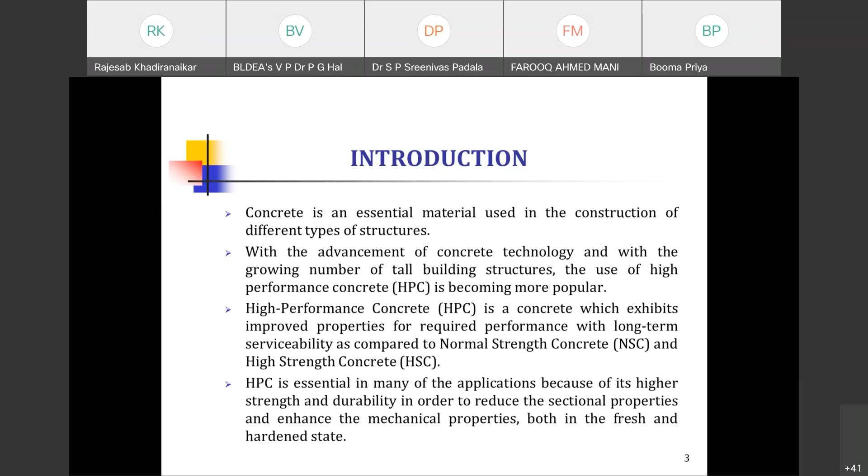But for in situ construction, going in for these kinds of techniques may not work. However, they were able to produce high strength by applying high pressure. That was the earlier attempt, and later in 1984, the American Concrete Institute adopted high strength concrete as a concrete with a strength more than 40 or 41 MPa.

And here, in my discussion, of course, there are no standard yardsticks for defining high strength and high performance as such. The strength limits that we are considering are time dependent as well as geographical location dependent. The concrete that was high in strength, for example, in the 1960s may not be treated as high strength now. So in 84, America for the first time defined concrete with a strength more than 41 MPa as high strength, and they adopted these concretes in actual construction also.

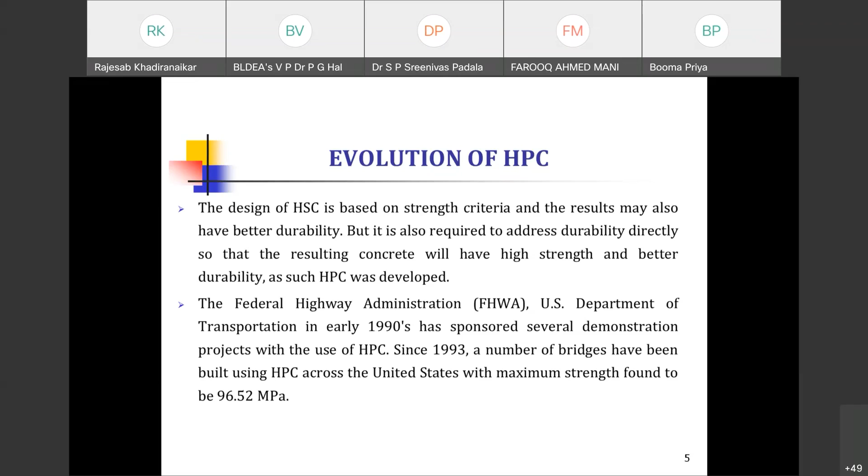So before we proceed ahead, let us see how high performance concrete is defined, and then regarding mix design, and after that we'll go on to the properties. Let me make it very clear that there is no universally acceptable definition of high performance concrete so far. And of course, as I said, it changes from place to place, and the time domain is also important. But there are some definitions which are broad, embracing these. I have given some of them here. There is no common definition for high performance concrete as such.

As I said, for high performance concrete there is no universally acceptable single criterion, and it depends on the required performance characteristics. If you have offshore structures, then the performance characteristics are different. And if you have freeze-thaw resistance, then the requirement is different. So it depends on what the intended use is and what the required performance level is. Based on that, many researchers and some bodies like ACI have defined high performance concrete from different considerations.

Then according to Mehta and Aitcin, who are pioneers in the development of high performance concrete and have contributed extensively to mix proportioning as well as experimental testing, the concrete which possesses high workability, high strength, and high durability is termed as HPC. This is the most general. So here it is clear that it covers almost all the desired properties of concrete in the fresh state as well as in the hardened state. Better workability is in the fresh state, and strength and durability in the hardened state. This was broader.

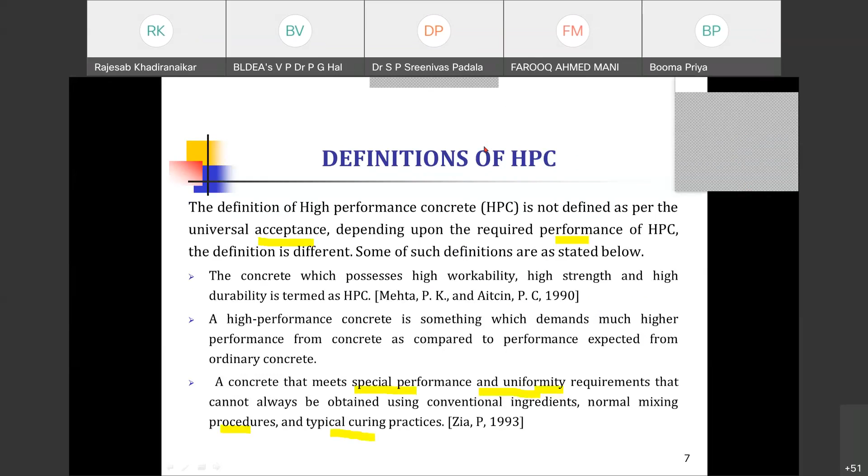Well, another important definition was proposed by SHRP, that is the Strategic Highway Research Program. SHRP defines high performance concrete, mainly keeping in view the requirements of highway construction. So HPC for highway application is defined on strength, durability, and water binder ratio criteria as summarized below. The compressive strength is determined for 100 mm diameter and 200 mm height cylinders.

Earlier, we were strictly adhering to the bigger size, that is 15 centimeter diameter and 30 centimeter height cylinder. But it has been found later that even if you go for smaller sizes while maintaining H/D ratio 2, you get reliable results. So that's why they used 100 mm diameter and 200 mm height cylindrical specimens. And water cement ratio is determined for all cementitious materials. And durability factor is in terms of 300 cycles of freezing and thawing.

So there was a thrust on strength as well as the water binder ratio, because you know that the performance characteristics, particularly the porosity, that is the diffusion or permeation characteristics, depend on your water binder ratio. So they consider the strength requirement, the water binder ratio and durability characteristics, that is 300 cycles of freezing and thawing. In 6 hours, SHRP expects around 14 MPa, then 17.5 MPa in 4 hours, around 35 N/mm² in 24 hours, and then around 70 MPa in 28 days.

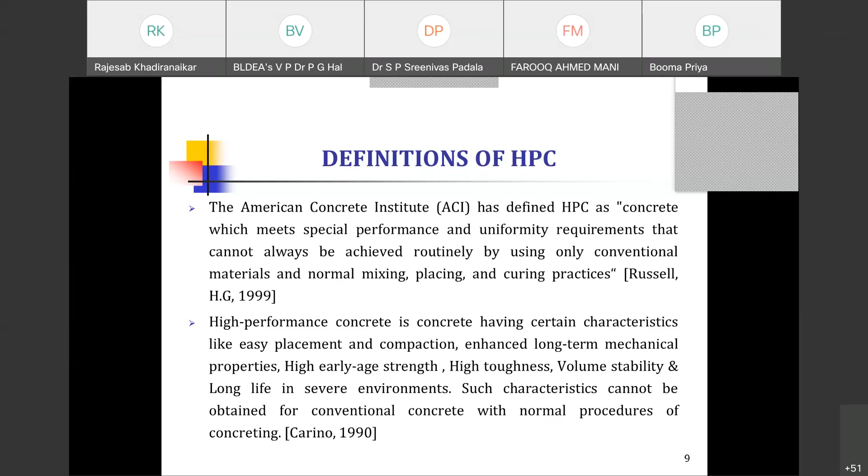Well, so now let us see, this is what the basics are, that is, some of the definitions. Of course, there are so many other definitions also. That is Civil Engineering Research Foundation, CERF. R.N. Swamy has also defined, Paul Zia. There are so many other researchers who have defined high performance concrete, but since we are more interested in properties and these things, ACI is the most widely accepted. So let us not go into much detail on only the definition part of it.

Well, so then how is your high performance concrete different from your conventional concrete? As you have already seen, it has improved performance at the fresh state as well as the hardened state. Then definitely it would have improved mechanical properties, durability, and behavior of HPC. It differs significantly, to a very large extent, as compared to normal strength concrete and high strength concretes, due to a dense microstructure by use of finer materials as well as superplasticizers.

So if anybody has studied the mechanical properties, why we have a particular type of behavior for conventional concrete, that is curvilinear stress-strain characteristics, and then micro cracking, all those. You might have already studied or be aware that those properties are basically because of the kind of cracking that takes place even before a conventional concrete is loaded. That is, the microstructure is responsible for the type of behavior that you have for your conventional concrete. So since you are changing the microstructure here, accordingly there is a change in the behavior of your high performance concrete, because your HPC has a more dense microstructure, and definitely the cracking pattern here changes, and accordingly there will be a change in the mechanical properties of your high performance concrete.

So then HPC has many advantages as compared to conventional as well as HSC. HPC can be advantageously used in construction of columns, beams, slabs, long span structures, any structure you name. You can use it particularly where you have sub-zero temperatures or durability issues, then HPC can be effectively used. So the use of HPC will, of course, have improved mechanical properties. And once it has improved mechanical properties, then definitely there will be a reduction in sizes of the structural elements. And once the dimensions are optimized, then definitely you'll have increased available space, and also there will be a reduction in the overall dead load. And if there is a reduction in dead load, definitely there will be a reduction in the total load coming on the foundation of the structure, and the overall economy would be there in the design of your concrete structures.

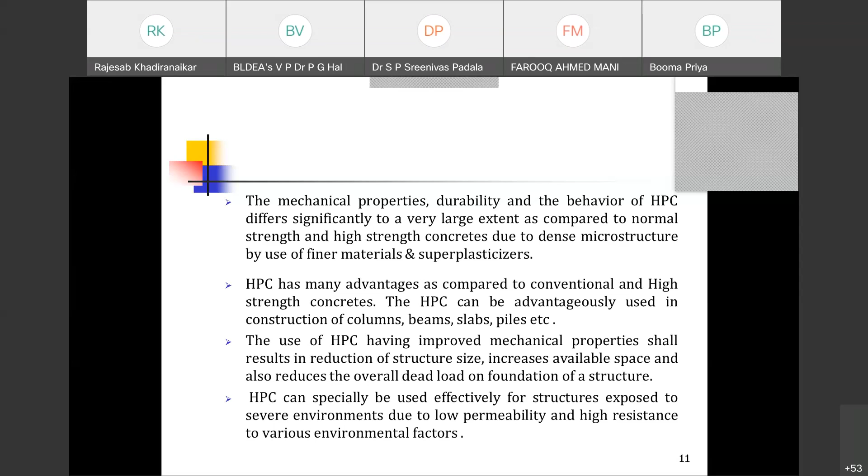This high performance concrete can especially be used effectively for structures exposed to severe environments due to low permeability and high resistance to various environmental factors, wherever the performance issues are there. Okay.

Then coming to the characteristics of how HPC is identified, what are the bases? So in the definition, you have already seen that it will have a high early strength, and very high early strength concretes also have been developed. So it is HES, high early strength, or very high early strength, like that. So it will have early strength, particularly for repair and all that. This is a very useful material. So high early strength, and ultimate strength is also high. And then it will have a high modulus of elasticity, particularly in pre-stressed concrete, and other issues where serviceability is a problem. So increased modulus is advantageous.

And high abrasion resistance, like industrial structures, that is industrial buildings or industrial floors, and then pavements, that is road pavement or airfield pavement. So abrasion resistance is another desirable property. And high durability and long life in severe environments. Then low permeability and diffusion characteristics, because the permeability depends on the diffusion character, that is, the permeation characteristics.

Resistance to chemical attack, and high resistance to frost and de-icer scaling damages. In some of the countries, for a very long period of the year, there will be sub-zero temperatures. In that case, this frost resistance becomes a major issue. And toughness and impact resistance in bridges and offshore structures.

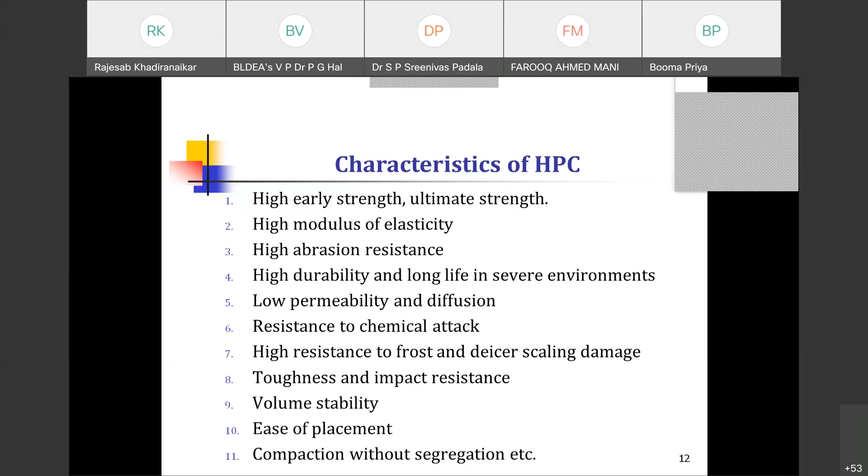Then volume stability, reduced creep and shrinkage, ease of placement, then compaction without segregation. This is also a very important property, because a lot of voids will be there if it is not effectively compacted or if there is segregation. So those were the characteristics of high performance concrete.

And when we go for adopting high performance concrete, then there will be a reduction in the member size, as already highlighted, and that results in an increase in the plinth area, usable area, and a direct saving in concrete volume. And then reduction in the self-weight of the structure and the superimposed dead load, with accompanying saving due to smaller foundations. Then reduction in the formwork area also, because your structural sizes are reducing. Accordingly, the area of your formwork is also reduced, and cost, with the accompanying reduction in shuttering as well as stripping time, and high early gain in strength, high early strength or very early strength, what we call.

The construction of high-rise buildings with the accompanying savings in real estate cost in congested areas. We'll see in the application part, in the last part of this discussion, wherein it has been very effectively used for the construction of tall structures. There will be a reduced axial shortening of compression supporting members, particularly in tall structures and in heavy structures. The reduction in the number of supports and supporting foundations due to the increase in spans. For suspension bridges or cable stayed bridges, you can go for increased spans. Reduction in the thickness of floor slabs and supporting beam sections, which are a major component of weight and cost of the majority of the structures.

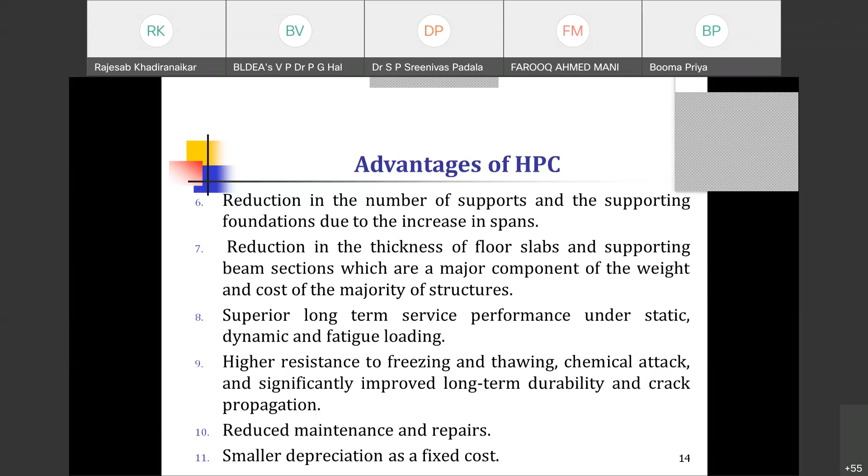Well, you have attributed many good characteristics to high performance concrete. If you use high performance concrete, then you'll have so many advantages. Now let us see how exactly to achieve this high performance. That is the basic issue. This high performance concrete is divided into 5 classes. And of course, as I said again, it is not universally acceptable. Some classifications are done from time to time, based on experience and the state of the art. And now this may be codified in the near future, as Aitcin expressed.

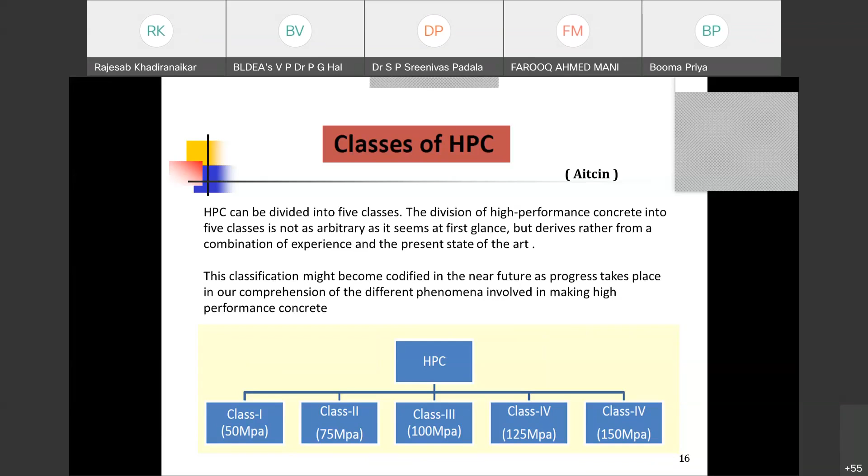The comprehension of different phenomena is involved in making high performance concrete. Right now, we do not have a universally acceptable codified procedure for high performance concrete, particularly when we speak about the Indian context. We need to codify a lot of things. So HPC class 1 is up to 50 MPa, class 2 is 50 to 75 MPa, class 3 is 100 MPa, class 4 is 125 MPa, and class 5 is 150 MPa. Of course, some people have produced in laboratory conditions more than 150 MPa also. But in our laboratory, we have produced up to 120 MPa. Working on mechanical properties, we have produced 2 PhD theses up to 120 MPa.

So now the question is how to achieve this high performance. You said it has this attribute, that attribute, and so many things: good properties in the fresh state as well as in the hardened state. So how to achieve this, that is the basic issue. The better durability performance has been achieved by using high strength and simultaneously a lower water binder ratio or a lower water cement ratio. There are many techniques for this. The first technique is that we have to go for a lower water binder ratio or a lower water cement ratio.

So in general, better durability performance is achieved using high strength and a lower water binder ratio or lower water cement ratio. And this approach of design is based on strength and result. Of course, even though you are designing based on strength, it instantly leads to better durability also.

So then your high performance concrete will have better performance, namely the durability characteristics. They are also addressed when you design it for strength. Though in the approach the design is based on the strength, the result is better durability. Durability is addressed directly by optimizing the critical parameters, particularly the particle size required for the materials. That is, the particle packing density technique is one of the techniques that we are using for producing high strength as well as the high performance characteristics.

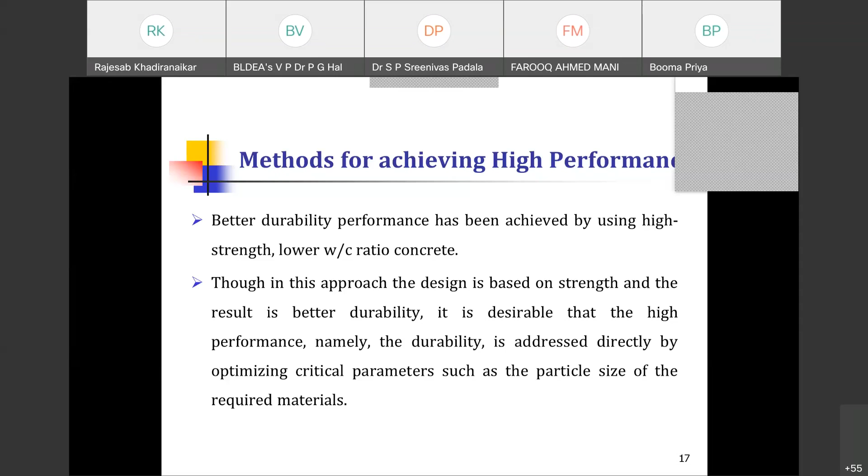As I said, there are two basic techniques that are used for achieving high performance, two approaches basically. One is reducing the capillary pore. As I said, at the microstructure level, this is how HPC or HSC is distinct from conventional concrete. I said that it has a reduced porosity. So reducing the capillary pore system such that no fluid movement can occur is the first approach for achieving high performance. This is very difficult to realize, and concrete will have some interconnected pores. Totally you cannot avoid them, but we can minimize them.

So how exactly is that achieved in practice? We need to reduce the capillary pores. First, reduced water binder ratio. When I reduce the water binder ratio, at least the water voids will come down. Then, use of fine fillers like silica fume, wherein even the smallest of the voids will be filled. It also acts as a super filler as well as a super pozzolana. And then there will be good compaction. Then another technique is to go for better compaction and improved curing. Curing also is equally important. So the first technique, that is reducing the capillary pores, is achieved by these four means.

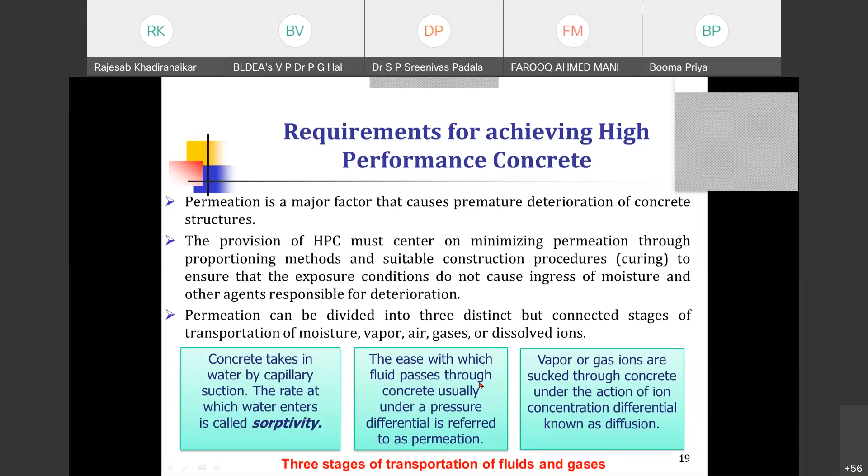So in addition to these permeation characteristics, there can be other performance characteristics which may become the specific need for high performance concrete. The other salient high performance requirements, in addition to the permeation characteristics, are a compressive strength of more than 70 MPa, which is already defined; a very early strength, within 4 hours, of 17.5 MPa, for highway constructions particularly; then an early strength of more than 35 MPa.

Then a high degree of impermeability, preventing ingress of water, moisture, carbon dioxide, sulfur oxides, air, oxygen, chloride. This depends on the permeability of concrete. High resistance to sulfate attack, this is chemical attack. Smooth fractured surfaces. Then absence of micro cracking. In conventional concrete, you have a lot of micro cracking because of a higher water cement ratio, so in this case the absence of micro cracking is there. Then a high level of corrosion resistance. Since the diffusivity is low, it will definitely have a high level of corrosion resistance.

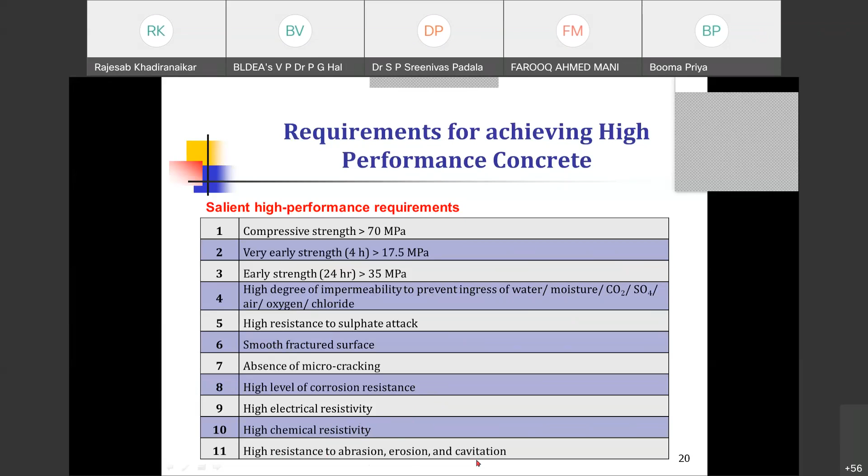Then high electrical resistance. This is another technique of measuring the durability or the diffusivity. Then high chemical resistivity, and high resistance to abrasion and erosion. These are physical phenomena: abrasion, erosion, as well as cavitation. Particularly for hydraulic structures, spillways and all that, you can effectively use this material because of the reduced cavitation effect. So all these were the characteristics of high performance concrete.

Now the question is how to achieve these characteristics, abrasion resistance, reduced diffusivity and all those things. The parameters that are to be controlled for achieving those performance characteristics that we have just seen: you need to take these precautions. If you keep these points in mind, then you will be able to achieve all those performance characteristics. So the following parameters need to be controlled.

One is the water cement or the water binder ratio. As I said, less than 0.3 or 0.35, we prefer that. Then you need to control the strength. You have to concentrate on strength. If the strength is more, naturally the durability characteristics will also be improved. Then the densification of cement paste, particularly the transition zone, where in conventional concrete you have a bigger transition zone and a lot of porosity. So densification of cement paste is being done.

Then elimination of bleeding. Anyway, we are going in for reduced water content. Water binder ratio means reduced water content indirectly, so the bleeding is eliminated to a larger extent, and there is homogeneity of the mix. Here we are going in for more powdery material, and we are moving from non-homogeneity towards homogeneity. In some cases we are also reducing the size of the aggregate. Routinely we go for 20 mm down size, but if you want more than 100 MPa, then we go for less than 12 mm, that is 10 mm or even less. That brings more homogeneity.

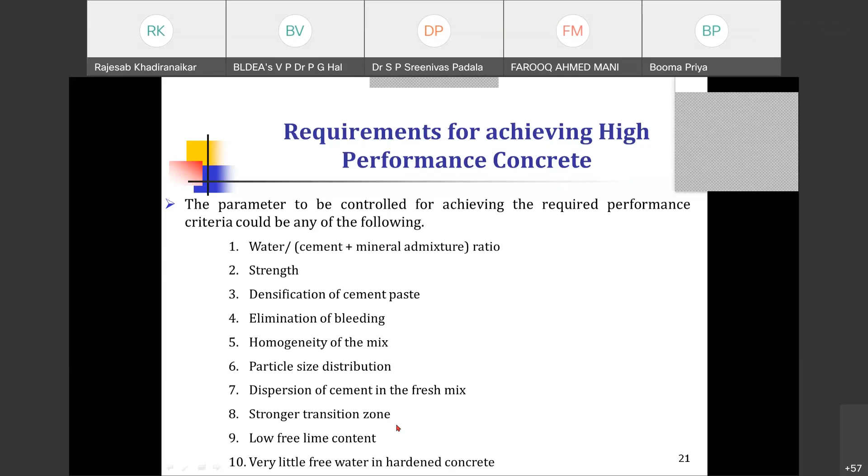There is no question of any water remaining in your hardened concrete. So this is how, by controlling these parameters, you'll be able to produce high performance concrete with improved durability characteristics. So then, as I said, if you want to achieve improved properties in the fresh state as well as in the hardened state, then mix proportioning is also equally important. And we'll see how mix proportioning is different.

I'll not go into all the mix proportioning techniques that are available, because mix proportioning itself is a big area, and it may need 1 or 2 lectures only for mix proportioning. Only highlights I'll tell you. And equally important is the selection of constituent materials.

Many times what happens is we go for choosing the materials the way we do it for conventional concrete, then that will not work. All the constituent materials that you are picking must be very judiciously picked up, and you have to take very stringent measures for selection of constituent materials. It may be cement, fine aggregate, coarse aggregate, water, mineral admixtures, or chemical admixtures. In all these cases, you have to be very cautious. You might have a very good mix proportioning technique and mixer available, but if your constituent materials lack the basic requirements, then you will not be able to produce high performance concrete.

That is why the cement that you are choosing should be appropriately chosen. For high performance concrete, as you are aware, we must have a lower C3A content, and increased fineness is better. And it must be compatible with your high performance concrete, because compatibility issues will be there. Better you go for the fourth generation superplasticizers or HRWRs. It is C3A content that controls the rheological properties of your mix, so we have to be cautious about it. Around 5 percent C3A content is much better. So cement is equally important, and coarse aggregates, their size, their content, everything is important.

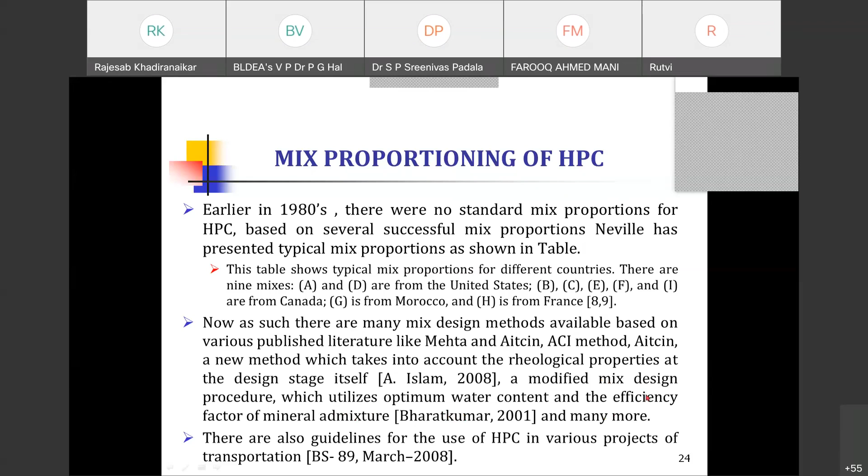And then a modified mix design procedure is also there. The LCPC method is also there. And this modified mix design procedure utilizes optimum water content and the efficiency factor of mineral admixtures. There are also guidelines for the use of high performance concrete in various projects concerned with transportation, and BS-89 British standard. And there are so many techniques.

Of course, earlier the cement content was higher. They were going in for 530, 500, more than 500. Some people also used around 600. But keeping in view the heat of hydration, it is not advisable nowadays. At that point of time, the superplasticizers were not that effective. So that's why they were resorting to a high cement content. But now you can go for reduced cement content.

Some people are using around 300 to 350 and still producing 100 MPa with increased fly ash content or silica fume content. So you'll find that the main characteristics are the water cement ratio or water binder ratio.

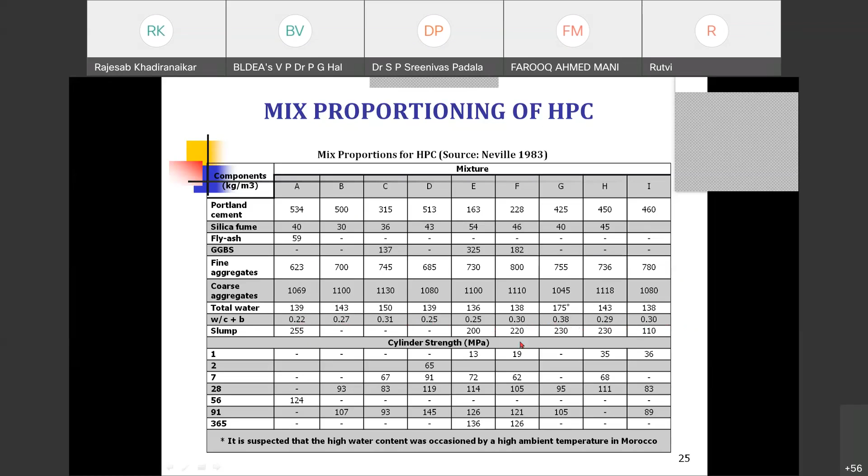This is the main point: we have seen the two techniques of reducing the water binder ratio, so 0.22, 0.27, like that. They have reduced the water binder ratio, and by virtue of that, they were able to get a high strength. So coming to our BIS method, that is 10262 2009.

The 2019 version has also come now, of course. The earlier code was listing up to M60, and it has standard deviation values also. As the strength increases, the standard deviation value has also increased. But when we go for a very high strength concrete, this unduly high standard deviation value may lead to a lot of reserve strength and some uneconomical mix proportioning also.

But in some of the codes, instead of standard deviation, they go for a reduction in the strength: they divide it by some factor, and then increase the strength and design for that. But in our case, the standard deviation values are increasing as the strength is increasing.

But really speaking, if I go for more and more strength, the standard deviations are basically dependent on the variability in the properties of the mix you are targeting. As the strength increases, you are going in for more and more stringent selection of materials, mixing, proportioning, and placing. Naturally, you have better quality control and the standard deviation has to come down. But the technique we are following is increasing the standard deviation values, so we need to think about that.

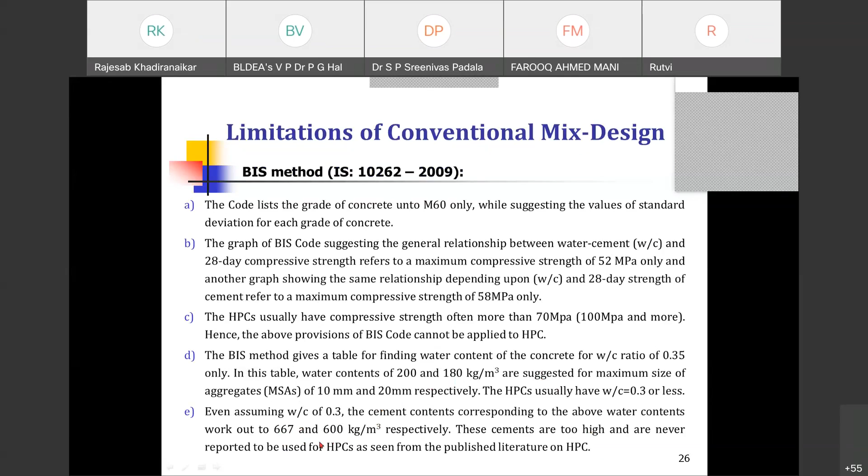The BIS method even allows zone 4 sand, with around 50% less than 300 micron. But HPC usually has very low water content, and this large content of small particles in sand would reduce the workability of HPC. Normally we do not prefer much finer material because we are going in for more binder content, and we already have finer materials in the form of binder or mineral admixtures. That's why it's not advisable to go for such fine sand. These are some of the drawbacks of the existing BIS method.

The ACI method, of course, is slightly better than ours, at least up to 60 MPa. And here also the minimum water cement ratio is 0.3. Sometimes we need to go below 0.3, and then it becomes a problem.

Road Note number 4, here also the minimum water cement ratio is 0.35, but we normally go below 0.3. So you cannot apply this. IRC was a very popular technique, and here the minimum water cement ratio is 0.4, and the strength is around 50 MPa. Since we are dealing with less than 0.3, we cannot adopt this technique either.

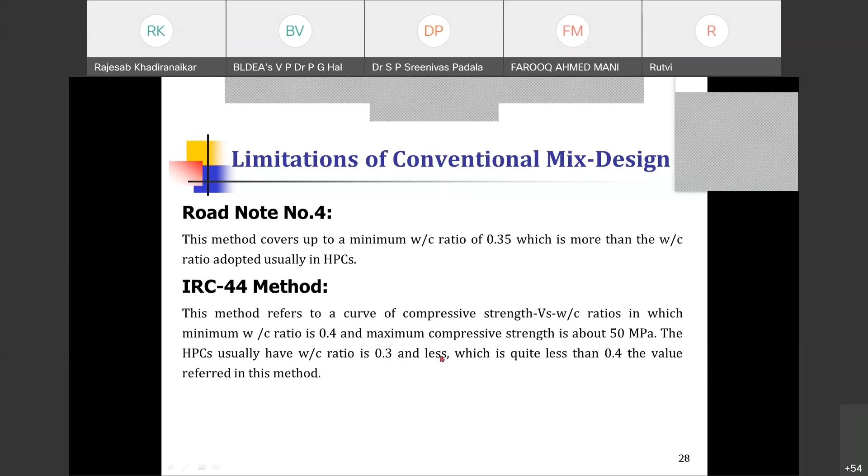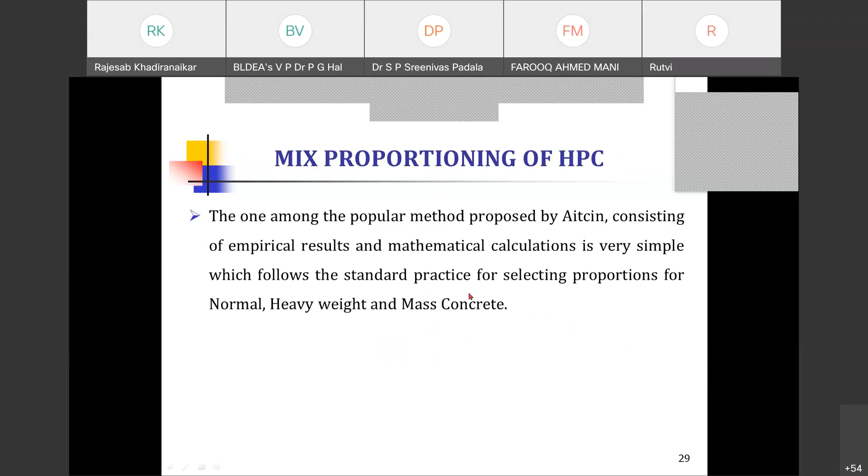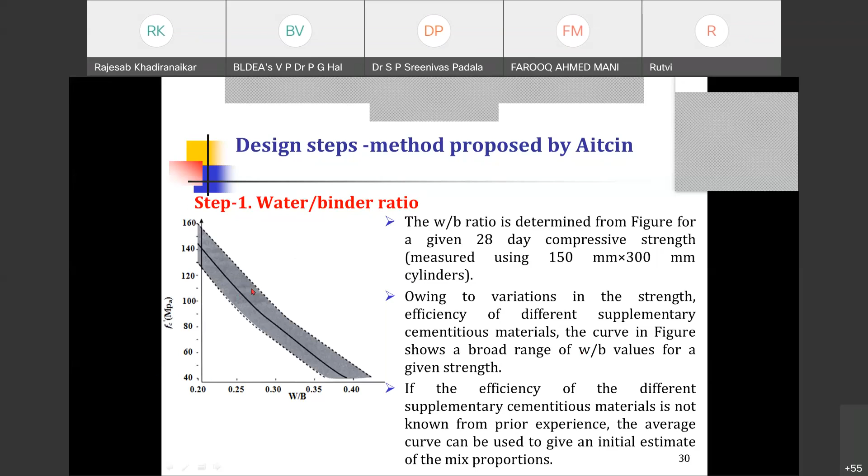The band is there owing to variations in the strength efficiency of different supplementary cementitious materials. The curve in the figure shows a broad range of water binder ratios. Based on your requirement and the efficiency of the different supplementary cementitious materials you are using, you can choose the water cement ratio. This can be used only as an initial or starting point, but your experience matters a lot in this case.

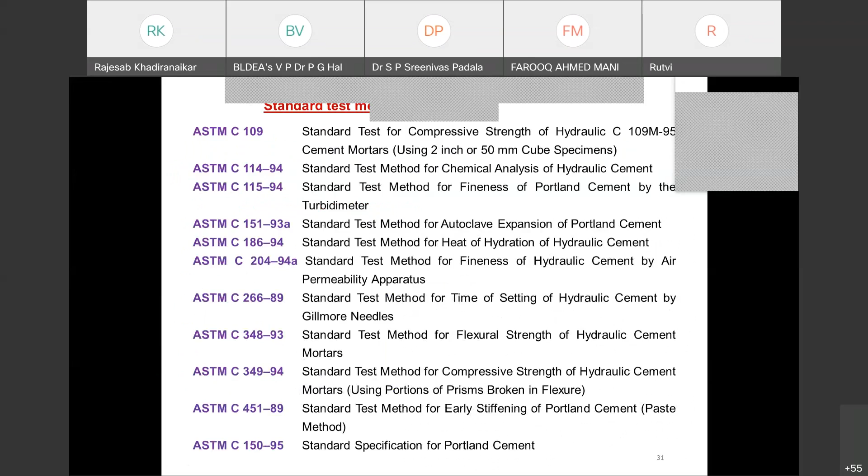So these are different test standards. Of course, these are available; you can find them. Okay. So what is the step? From the first graph you choose the water binder ratio, and once you choose the water binder ratio or water cement ratio, then we have to find out how much the water content is.

The saturation point is the point beyond which any increase in the dosage gives no further benefit, as you already know. Using a simple Marsh cone test, you can find out the saturation point. And if the saturation point of the superplasticizer is not known, then it is suggested to start with around 145 liters per cubic meter. As I said, a lot depends on your experience.

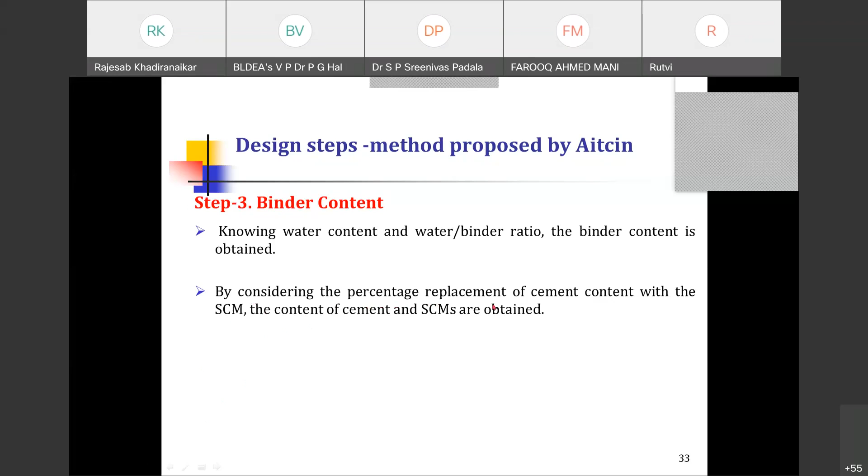To design a mix, it is not that you have to start with 120 or 125 only. You can add around 5 liters per cubic meter of water to these values and start with your first trial, and then based on the experience of that, you can go on modifying. Okay. So based on the saturation point, we choose the water content. Once you know the water binder ratio and water content, you can find out the binder content, and then decide how much percentage of SCM, supplementary cementitious material, you want to replace.

Once you choose the binder content, you need to go for the coarse aggregate content. It depends, as I said, on the characteristics of your aggregate, particle shape, size, and so many things. If the shape of the coarse aggregate is unknown, or you are not very sure about those properties, you can start with around 1000 kg per cubic meter of coarse aggregate. If you have a clear-cut idea of the type, then the range is 950 to 1150, with elongated and flaky at the lower end.

So in this range, an average in this range, then for cubical shape you can go slightly higher, and for rounded still more. So based on the type of aggregate, you decide between 950 to 1150 kg per cubic meter.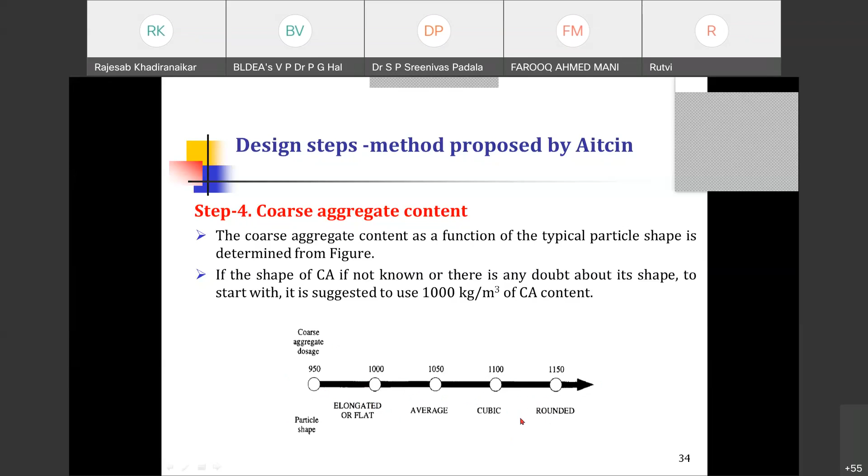After that, the air content, and the authors normally suggest around 1.5%. But of course, it also depends on the superplasticizer that you are using. Or if you want to find out the actual air content for the combination, you can take that. Normally it is around 1.5, and that much is considered in the mix proportion.

And the superplasticizer dosage, by the Marsh cone test you decide. If you don't have any idea, then you start with 1% dosage, and then go on adding based on your requirements or based on performance in the tests. You can go on changing that.

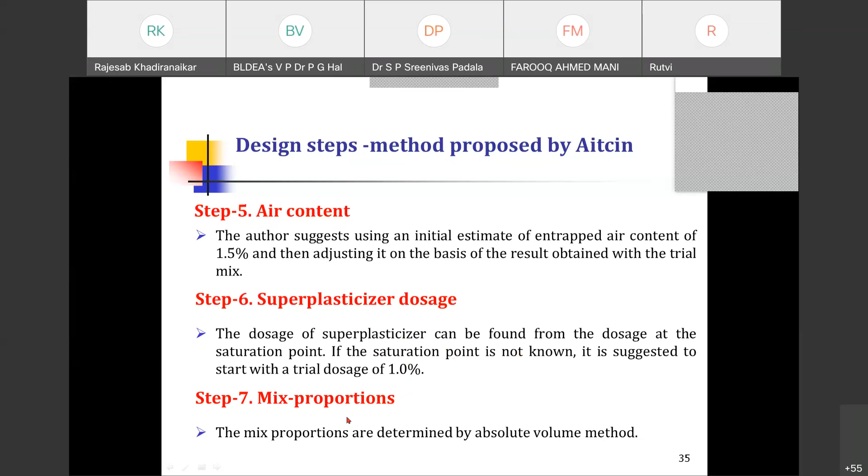Then the final mix proportions are determined by the absolute volume method. Of course, all the techniques use the absolute volume method only. So using absolute volume, whatever other constituent materials are there, you can use that. And if you still want to refine it, sometimes people also go for, particularly when it comes to the superplasticizer, separating the liquid content in that, and then the liquid content as well as the solid content. That level of refinement you need.

You first find out the total volume and divide that into a solid as well as a liquid component, and then accordingly you can do the corrections. So this is how the Aitcin method works. As far as my experience is concerned, this method gives better results compared to all the other techniques that are available in the literature.

So once you design, you have to start producing it, and then in the fresh state, what matters are the properties of the fresh concrete. As you have seen, HPC is characterized by special performance, both short term as well as long term, so it should give you better properties. One of them is the workability of high performance concrete. HPC must have exceptionally good workability because we are using admixtures like superplasticizers, that is HRWRs, and we are also using higher levels of cementitious materials like fly ash, silica fume, GGBS. These things are also added, and it will definitely have better workability compared to conventional concrete.

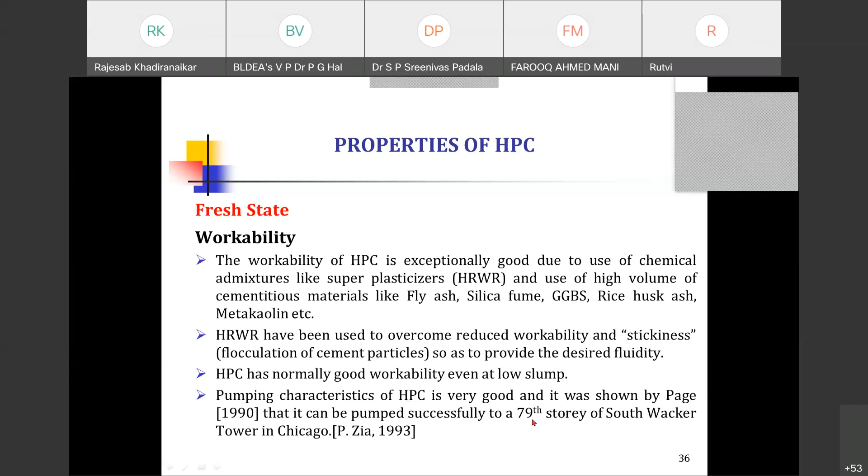Concrete rheology is another important property, how it behaves: stiffening, hardening, all those things. This is governed by physical as well as chemical factors. Among the physical factors, the grain size distribution of the binder particles and aggregates, and the shape of the aggregates also matter. The beneficial effect of adding silica fume powder in a high performance concrete mixture is that it improves the grain size distribution, that is, the particle size distribution, as we normally call it. When minute spherical silica fume particles are well dispersed in the cement water system, they can displace water molecules from the vicinity of the cement grains, so that entrapped water molecules between the flocculated cement particles can be freed and thus contribute to the fluidizing of the mixture.

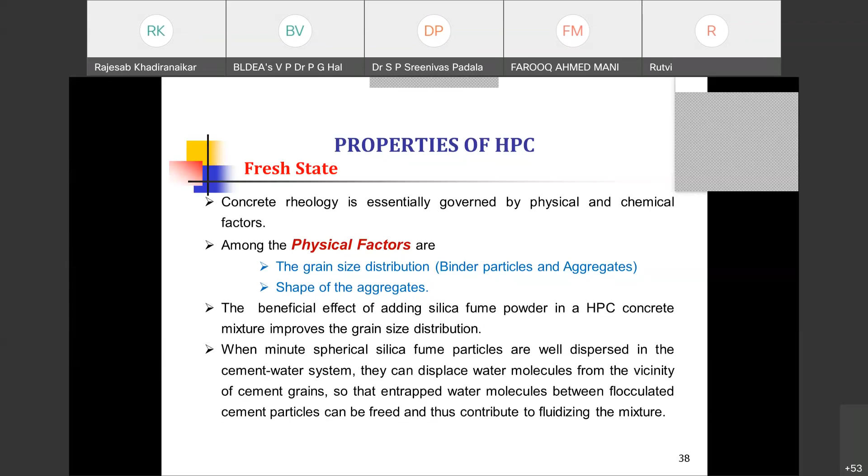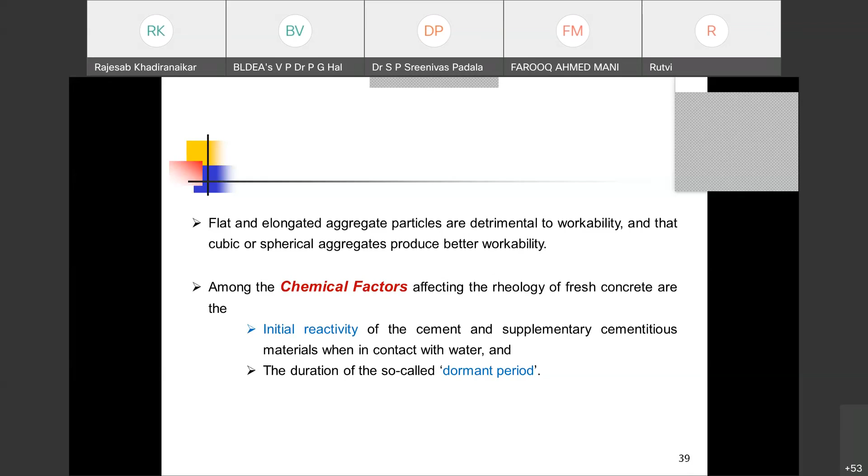Flat and elongated aggregate particles are detrimental. Of course, we are not using them. As I said, the cubical shape is better rather than elongated or flaky, which are detrimental to workability and even to strength, and even from the transition zone point of view they are not good. So we have to go for cubical or spherical shaped aggregate, and they produce better workability. Among the chemical factors affecting the rheology of concrete are the initial reactivity of the cement and supplementary cementitious materials when they come in contact with water, and the duration of the so-called dormant period. So this is also important.

Then coming to the setting or stiffening of high performance concrete, the setting time of HPC varies depending upon the volume of the different cementitious materials you use, and also on the dosage of superplasticizer. Some of these superplasticizers, as you have seen, also act as retarders, so they cause a delay in the setting time. So before you use any particular brand, you have to be very sure to what extent of retardation it causes. This may cause slump loss also and reduces the very early strength of HPC, even though the strength at 24 hours may be relatively high. Retardation longer than 24 hours has been experienced in the field without harming the ultimate compressive strength.

Of course, for the initial setting, if you go for a higher percentage, particularly more than 2%, then 2%, 3%, 4% like that, in some cases there will be retardation, meaning the setting is delayed. Even after 24 hours it will not set; sometimes 48 hours, 50 hours, 60 hours. In some cases in our own laboratory, with one particular brand of superplasticizer, we were not able to get the setting even after 72 hours. So all these things must be observed.

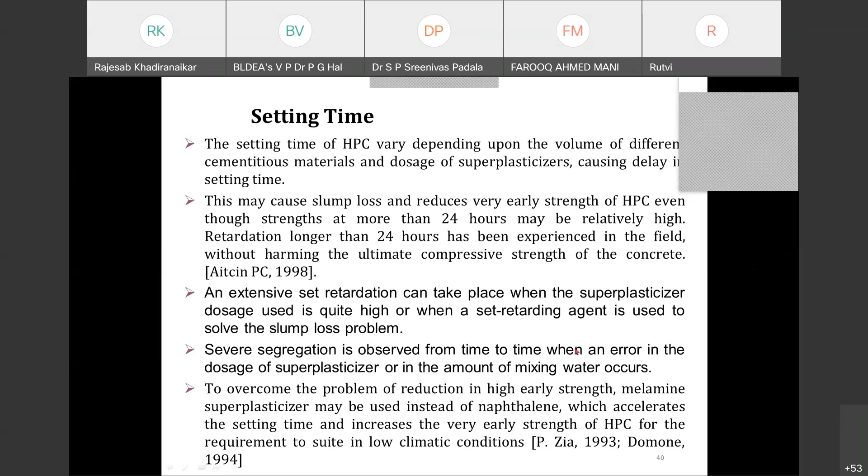Well, so that is how the properties are. Slump loss is, of course, a main problem that you have to take care of. Otherwise it will have better workability. After that, curing is also important. It is more important compared to normal concrete because of the lower water-binder ratio. Loss of water may interrupt the hydration process, and low bleeding may cause shrinkage cracks also.

That's why in some cases we resort to early curing of high performance concrete. If water curing is applied as soon as the HPC temperature begins to rise, most of the autogenous shrinkage can be eliminated. Depending upon the size and type of the structural element, different solutions for curing may be employed, with a minimum of 7 days of curing to minimize shrinkage, but in no condition shall the period of curing be less than 3 days, because they go in combination. It doesn't mean that it is only 7 and 3 days.

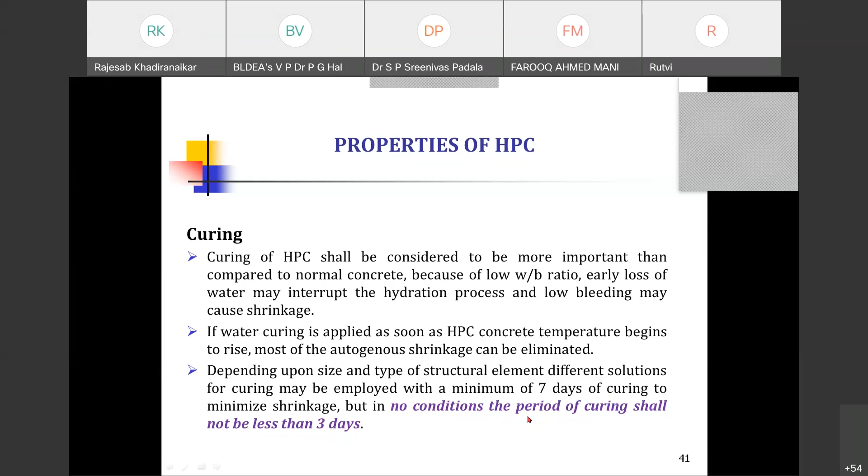Say you want to apply a curing compound in the initial period; normally they go for moist curing, and after that they resort to other curing. But a sufficient curing should be done. The most commonly used curing method for high strength concrete is wet burlap. Initial rapid loss of moisture will be there when you use silica fume particularly. So you can use wet burlap or plastic sheeting, and then curing compounds recommended along with wet curing. For HPC containing GGBS under non-standard curing conditions, it was found that due to lack of moist curing, the compressive strength of concrete reduced by up to 50%.

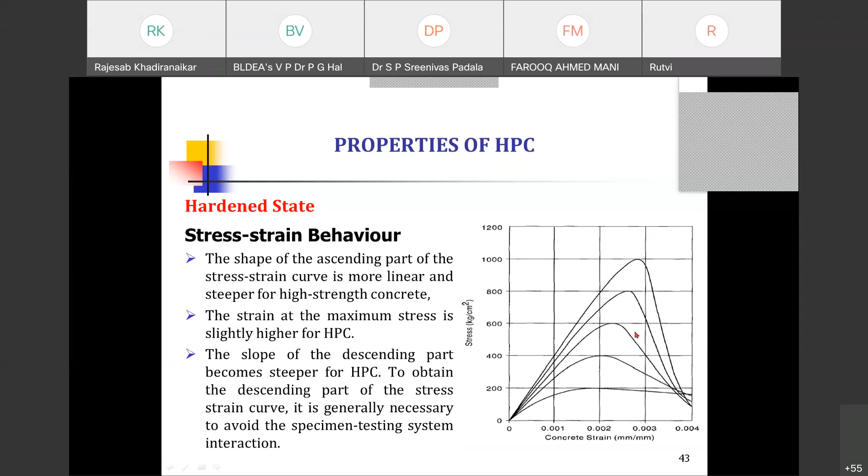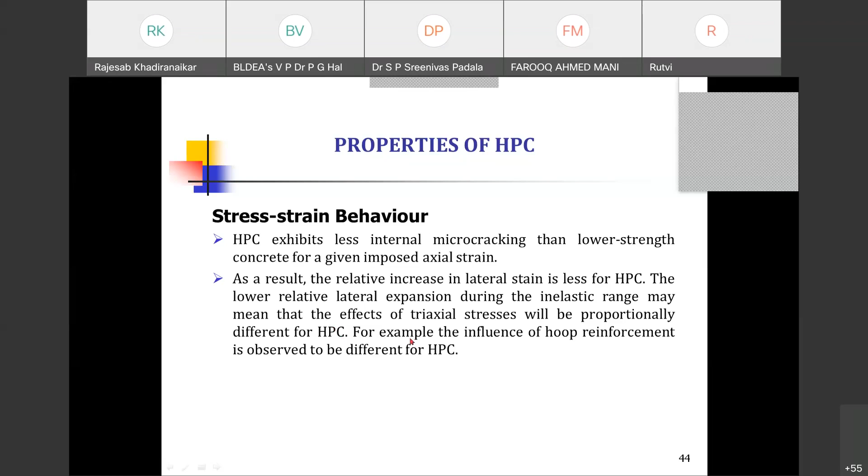Of course, the descending part of the stress strain curve. As a result, the relative increase in the lateral strain is less for high performance concrete. Less micro cracking naturally means the lateral expansion is also less. The lower relative lateral expansion during the inelastic range may mean that the effects of triaxial stresses will be proportionately different for HPC compared to conventional concrete, and the influence of hoop reinforcement is observed to be different for the high performance concrete.

And many people, of course, have proposed empirical equations for the stress strain characteristics of high performance concrete. And of course, there is no single 100% accurate equation that takes care of the ascending part, descending part, and the peak, all those things. Some of them fit the ascending part well, but fail miserably in the descending part. And up to peak, it is okay. Like that, there are so many equations.

Those who are interested in the post-peak state of a stress strain curve for usual concrete, researchers have proposed a number of mathematical equations that you always see. This is the one proposed by Thorenfeldt, Tomaszewicz and Jensen earlier. And later on, of course, Collins, Mitchell, and Collins and McGregor have suggested many equations. And in the post-peak, we need to do some corrections. These are the equations. If you go on giving different strain values, you can generate a stress strain curve.

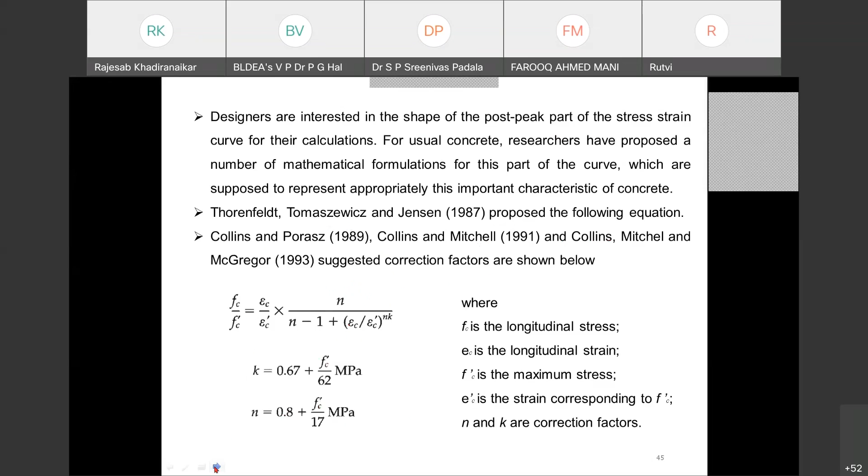So the second property of hardened concrete is compressive strength. As you know, the strength is more in this case, as the microstructural differences between the hydrated cement paste, the transition zone and the bulk cement paste play an important role in determining the strength characteristics of concrete. This is the well developed Weibull weakest link theory. You have studied earlier that the transition zone is the weakest link. So now it has been strengthened, and by virtue of that, you have the increased strength.

In usual concrete, the transition zone is typically 0.05 to 0.1 mm wide. Now it reduces in this case, and it has relatively large pores and large crystals of hydration products, that is, CH crystals. So porosity is also higher, but now it reduces in this case. Therefore, according to this theory, when the concrete is subjected to a given stress, the cracks first begin to develop in the transition zone, but now the transition zone is strengthened. The compressive strength of HPC is higher than normal concrete, minimum 60 MPa.

This property is influenced by various factors like material properties, proportions, water binder ratio, degree of hydration, rate of loading, method of testing, all those things. Water binder ratio effect also you see. Based on the water binder ratio, they are also classified. The compressive strength increases with the silica fume content up to 20%. Of course, the optimum is 10 to 15%. Very few people have gone beyond 20%, because beyond 20% there is no pronounced effect on the strength. So that's why normally in the range of 10 to 15% we use it.

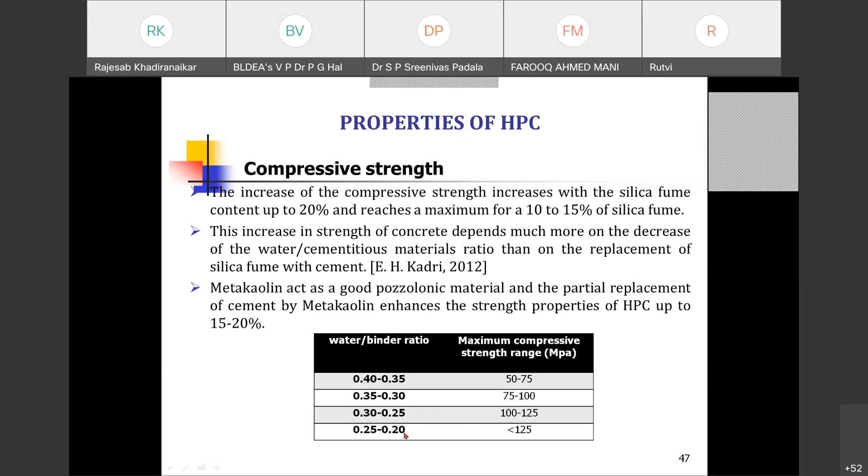The increase in strength of concrete depends much more on decrease in the water cement or water binder ratio. Also the replacement of mineral admixtures. Metakaolin is a good pozzolanic material with a partial replacement of 15 to 20%. In this range, with a water binder ratio of 0.4 to 0.35, they are able to get 50 to 75 MPa strength, and 0.35 to 0.3, it was 75 to 100. Then 100 to 125 for 0.3 to 0.25, and in the range of 0.25 to 0.2, it's around 125 MPa.

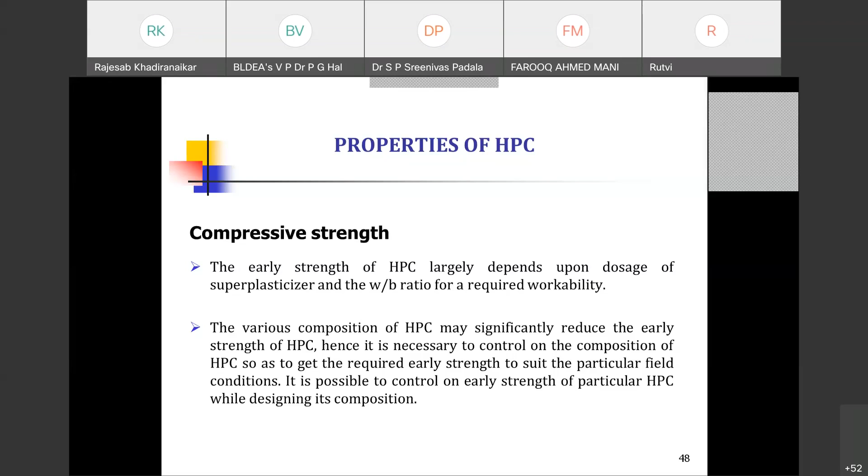The early strength largely depends on the dosage of superplasticizer and the water-binder ratio. The various compositions of HPC may significantly affect the early strength of HPC, and it is necessary to control the composition of HPC so as to get the required early strength to suit the particular field conditions and control the early strength of your HPC. And another important property is the tensile strength.

Hello, am I audible? Hello, hello. Yes, sir, you are audible. You are audible. Okay, no problem. No problem, sir. Yes, yes. Okay, I'll continue.

Tensile strength. One of the major advantages of high performance concrete is high tensile strength. Of course, there's no pro rata increase compared to compressive strength. But compared to normal concrete, it has a higher tensile strength, and you know that cracks propagate very easily if the tensile stresses exceed the tensile strength of the concrete member, and that may affect its durability also. The new generation of high performance concrete overcomes this problem due to its high tensile strength.

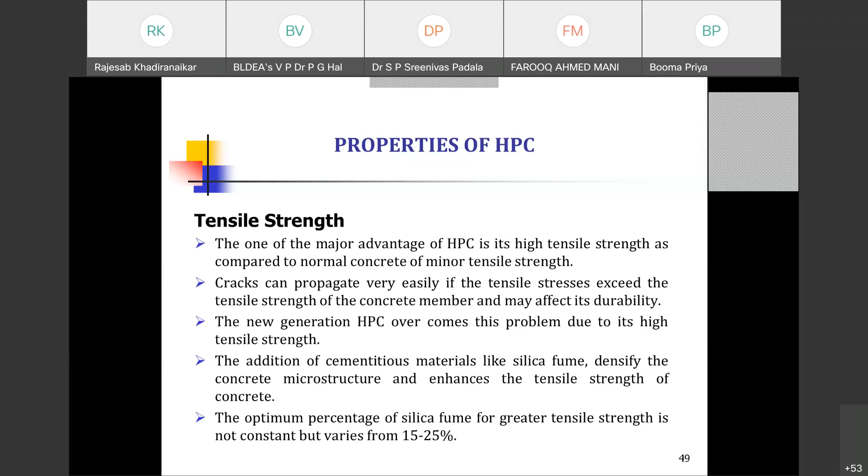The addition of supplementary cementitious materials, or SCMs, like silica fume or fly ash, densify the concrete microstructure and enhance the tensile strength of the concrete. The optimum percentage of silica fume, as you have seen earlier, is around 15%. They define 15 to 25, but 15 is the best. Usually the tensile strength is measured from empirical relationships with the compressive strength. All other strengths, tensile, shear, all those things we express in terms of the compressive strength. The same you can extend for high performance concrete also.

And many researchers have developed empirical equations for finding out the tensile strength in terms of the compressive strength, and some of them I have listed here. Whatever expressions you have for your conventional concrete cannot be directly applied and cannot be extrapolated for high performance concrete. Sometimes they give wrong or not reliable values. So this Sengupta split tensile strength is 0.248 times fc raised to 0.717. fsp is the split tensile strength here, and fc prime is the 28 days compressive strength.

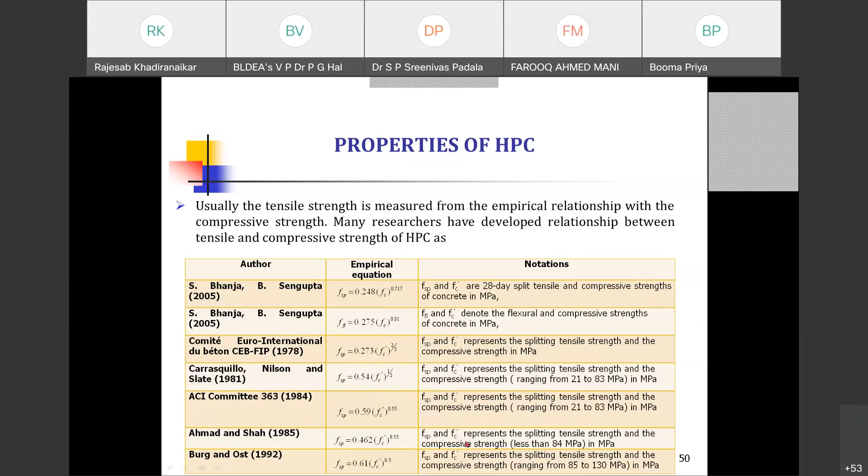And then another important property is the modulus of elasticity of concrete, and everyone generally agrees that the elastic modulus of concrete increases with its compressive strength, and the modulus is greatly affected by the properties of the coarse aggregate, the amount of coarse aggregate, all those things. It depends on the paste content and everything. The Young's modulus of HPC is an important short-term property. This is useful from the design point of view also.

It is generally related to the compressive strength, as you have already seen. As the strength increases, it increases. It depends on parameters like aggregate type, mix proportions, curing conditions, and rate of loading also. The larger the amount of coarse aggregate, the higher would be the modulus of elasticity. And the specimens tested in a wet condition indicated around 15% higher elastic modulus compared to the dry conditions. That was basically because of the drying that takes place in

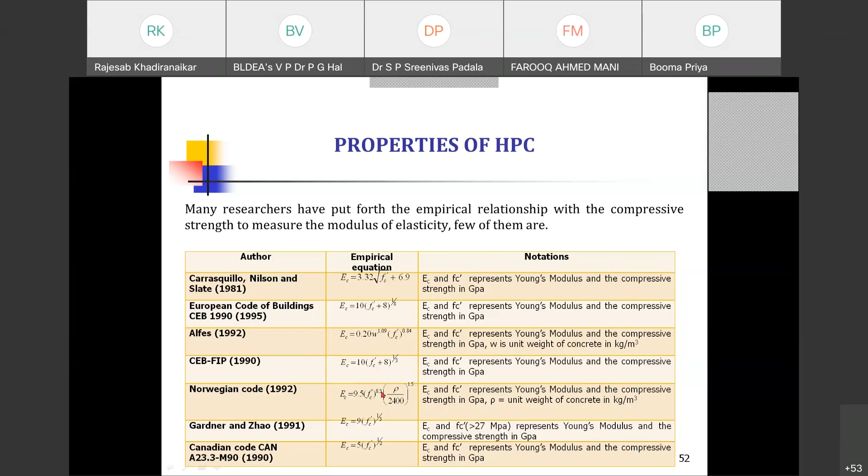So based on your requirement, you have to use the appropriate equation that is available. Then another mechanical property is the Poisson's ratio. Experimental data values on Poisson's ratio for HPC are very limited, since the experiments to be conducted are very typical and difficult. Most of them have worked only on the compressive strength, behavior, stress-strain characteristics. But Poisson's ratio work is a bit difficult, so very limited data is available on Poisson's ratio.

Pernchio and Klieger reported a Poisson's ratio for a compressive strength ranging from 55 to 80 MPa between 0.2 and 0.28. And they concluded that the Poisson's ratio tends to decrease with increasing water cement ratio, maybe because increased water cement ratio means more pores and more micro cracking.

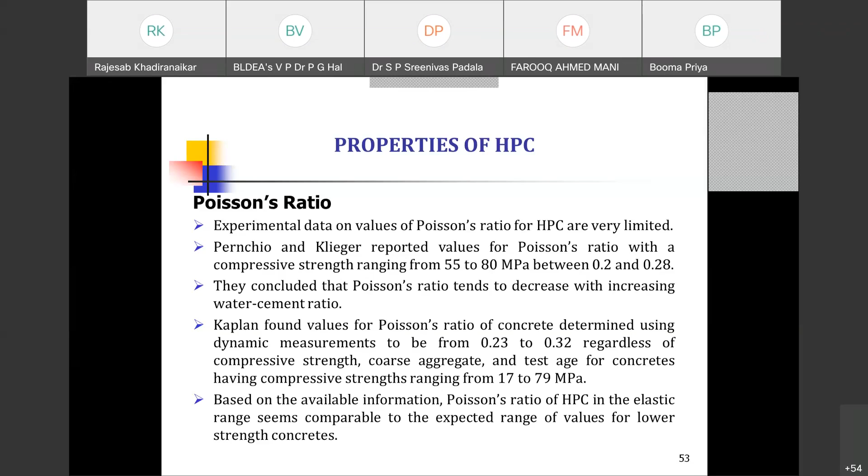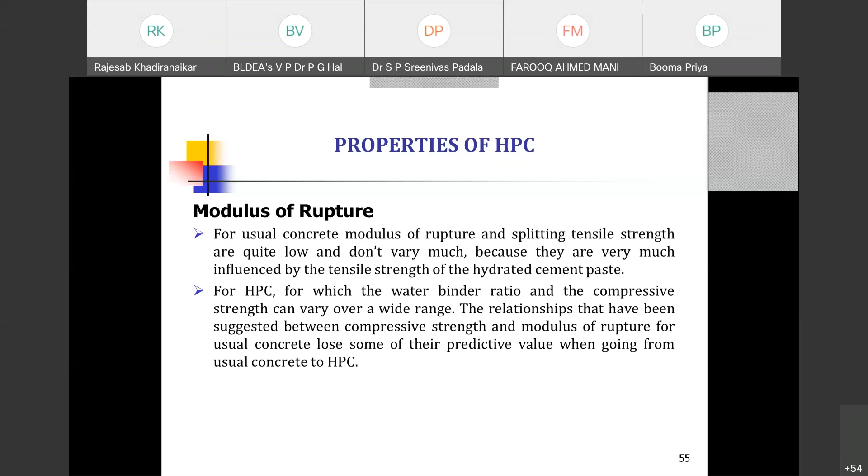Then the modulus of rupture. For usual concrete, the modulus of rupture and the splitting tensile strength are quite low and do not vary much, because they are very much influenced by the tensile strength of hydrated cement paste. For high performance concrete, the water binder ratio is low and paste content is higher, and the compressive strength varies over a wide range. So the relationships that have been suggested between compressive strength and the modulus of rupture for usual concrete lose some of their predictive value when going from usual concrete to HPC, due to a change in the composition of the mix.

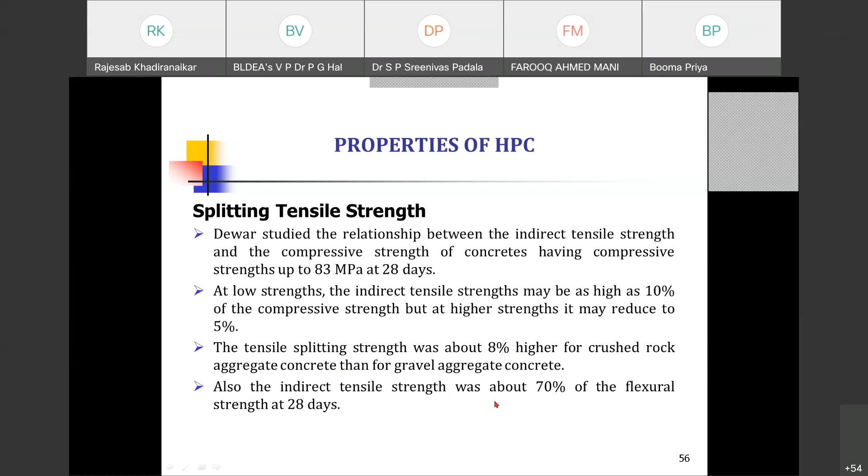Splitting tensile strength: Dewar studied the relationship between the indirect tensile strength and the compressive strength of concretes in the compressive strength range of 83 MPa at 28 days. At a low strength, the indirect tensile strength was observed to be around 10%, but when it comes to high strength concrete, it was observed to be around 5 to 8%. The tensile splitting strength was about 8% higher for crushed rock aggregate concrete than for gravel aggregate. Also, the indirect tensile strength was about 70% of the flexural strength at 28 days.

Hello, sir. Hello. How long can I continue? Is it okay? What is the time? Actually, it was till 12:30. Sir, you can continue, sir. No issues. So I have a few more properties, three properties, and then some applications. So I'll rush through these remaining slides. Is it okay? Okay, sir. Another 15 minutes or so. It's okay, sir. Continue.

Coming to the shrinkage, normally the perception is that since we are going in for more cement content or binder content, high performance concrete will have higher shrinkage. But that's not true. Concrete shrinkage is a quite complex phenomenon, and a detailed study has been done on it.

So we have plastic shrinkage, which develops at the surface of the fresh concrete when it is subjected to surface drying. Autogenous shrinkage basically depends on the self-desiccation chemical phenomenon. Then drying shrinkage is due to the loss of water in hardened concrete, and here it is less because we have less internal water in high performance concrete. Then thermal shrinkage follows a decrease in the temperature of concrete, and there is carbonation shrinkage, which depends on the permeability and thickness of the cover concrete. Since the cover concrete here is very dense, this is also reduced. So all these things contribute to the total shrinkage.

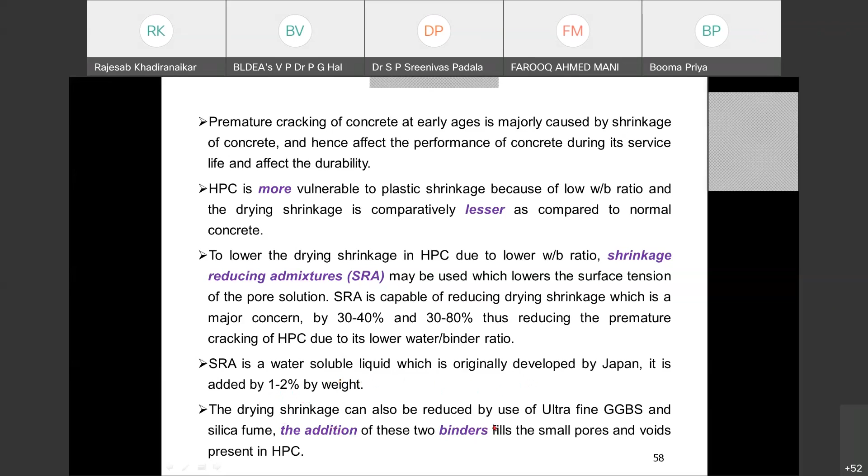That's a major concern, around 30 to 40%. And 30 to 80% reducing the premature cracking by the HPC. So these shrinkage reducing admixtures, they are water soluble and developed in Japan. So it's added by 1 to 2%. Drying shrinkage can also be reduced by use of ultra-fine GGBS-based particles, silica fumes. Then the other binders, you can reduce that.

Then coming to the creep. Creep is one of the important long-term properties used in the design and analysis of structures. As you know, it depends on the plasticity and flow properties of the concrete. And creep is important in assessing the long-term deformation as well as the performance characteristics. Creep and shrinkage are both interrelated.

The property of creep of HPC is remarkably different from that of normal concrete because of low permeability of HPC compared to normal concrete. The value of creep coefficient decreases with increase in the strength or decrease in the water binder ratio. And here we have a decreased water binder ratio and hence creep will be less. The value of creep coefficient is lesser in HPC as compared to the normal concrete. Use of shrinkage reducing admixtures also reduces the creep. It reduces shrinkage also, but in different capacities.

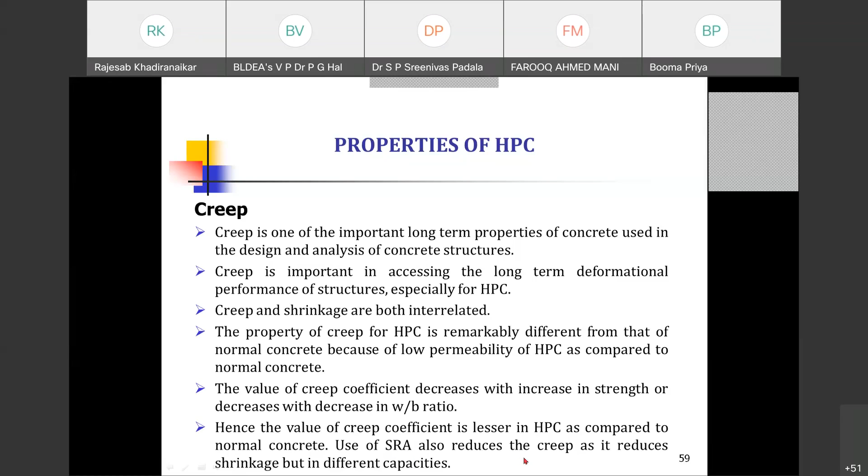And coming to ductility, the general notion is that as the strength increases, it becomes brittle. That is true also. The compression tests show that the stronger the concrete, the more brittle it is. And this could be of concern since modern design methods take into account the plasticity of materials. The flexure test run on the reinforced HPC beam shows that the ductility is similar to that of beams with ordinary concrete. So the material alone may be a bit brittle, but when you do the design and do a proper detailing, then whatever level of ductility you want to imbibe in your structure, that is possible.

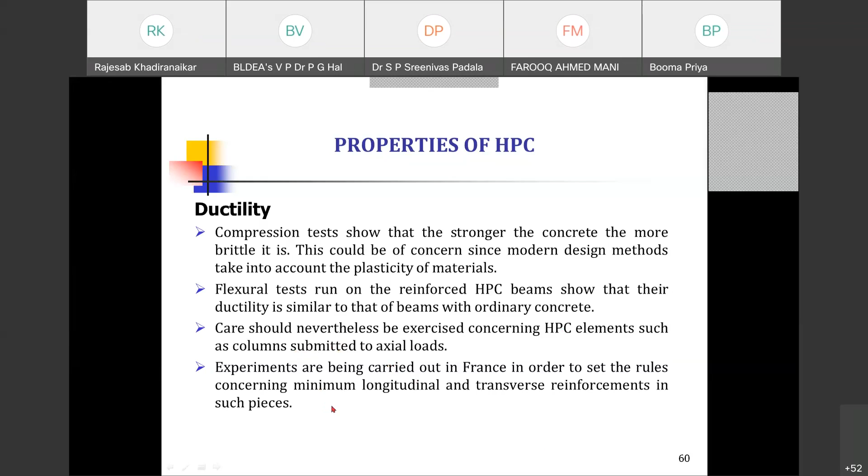Care should nevertheless be exercised concerning HPC elements such as columns submitted to axial loads. Experiments are being carried out in France in order to set the rules concerning minimum longitudinal steel and transverse reinforcement in such cases. Coming to the fatigue strength, since it is brittle, its ultimate strain capacity doesn't increase proportionately with increase in strength. There is an increase, but it is not proportionate.

And then in HPC, the elastic modulus of the paste and that of aggregate are more similar, thereby reducing the stress concentrations at the aggregate paste interface, and it is less susceptible to fatigue. So thus, due to reduced micro cracking in HPC, the fatigue life built up damages are smaller when compared with those in normal strength concrete.

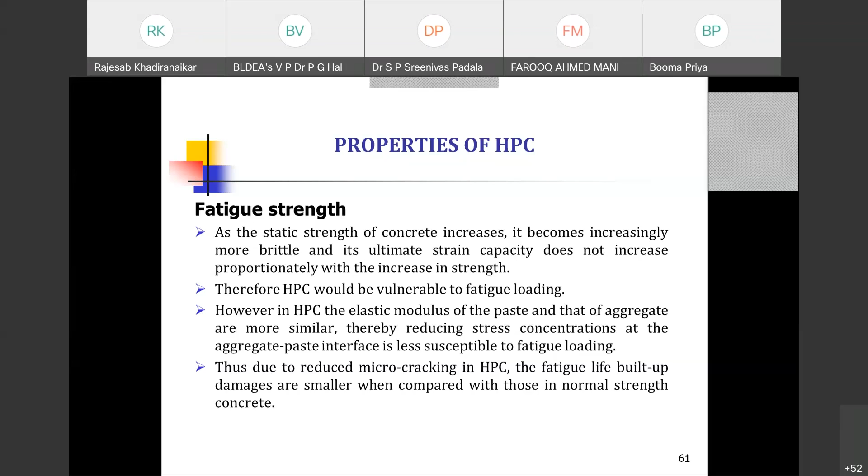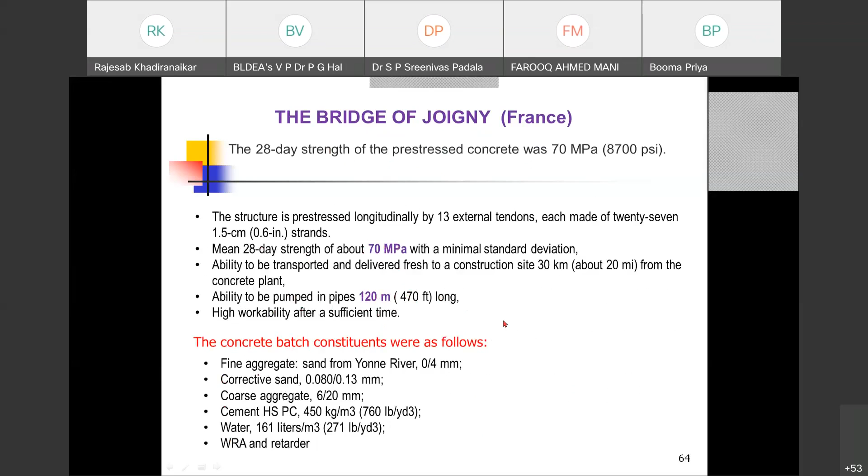In Joigny Bridge, these are the mix proportion details. These are available anywhere. The compressive strength was 70 MPa, and it was pumped for a distance of 120 meters without any problem. So workability was very good. This is a bridge constructed using high performance concrete, Joigny Bridge in France.

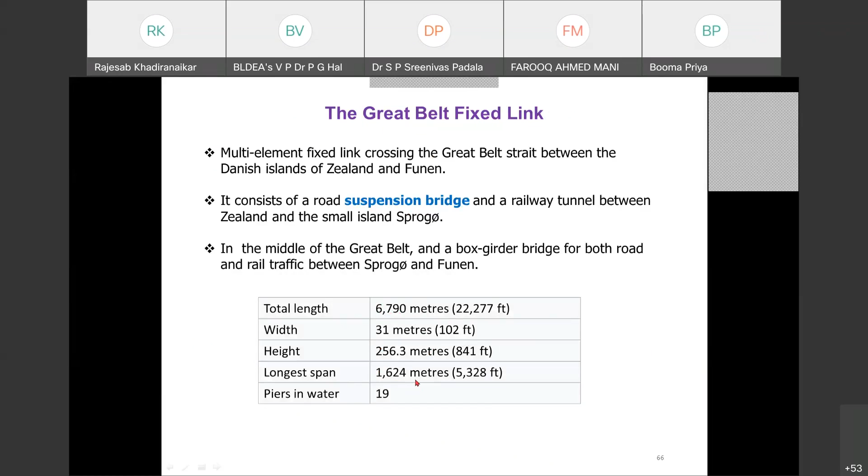And then this is the Great Belt fixed link. This multi-element fixed link crosses the Great Belt strait between the Danish islands of Zealand and Funen. It consists of a suspension bridge as well as other bridges. The total length is 6,790 meters, and the longest span is 1,624 meters. There are 19 piers in water. This is the link connecting.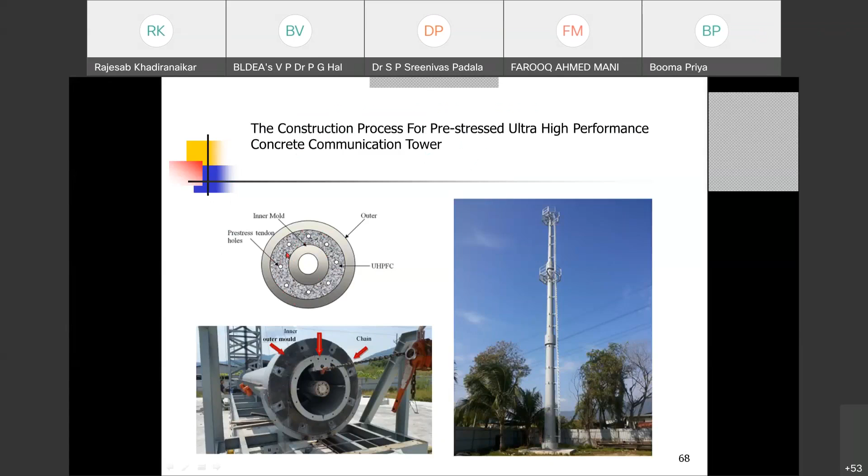And this is a pre-stressed ultra high performance concrete communication tower. They have the outer steel core and the inner core, and then this is filled with high performance concrete, confined, and the confined concrete like this, when you use, it gives you excellent performance. The communication towers you can use, and these are the properties of the mix that are being used for that pre-stressed tower. And then a bridge in Tennessee. This is another bridge, with deck and piers completely of high performance concrete.

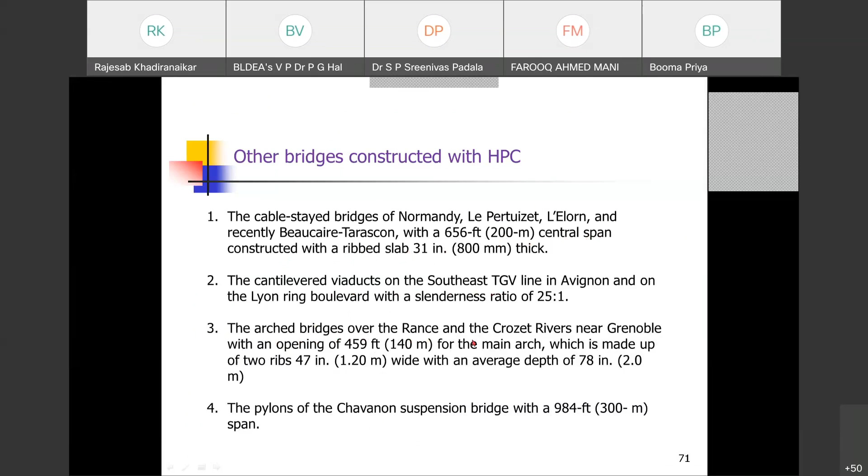The other bridges, the cable stayed bridge at Normandy. Then this is 656 feet, 200 meters central span with ribbed slab is constructed, and the cantilevered viaducts and the arch bridges at Rance. Crozet rivers near Grenoble. All road applications. The pylons of the Chavanon suspension bridge. These are some of the examples.

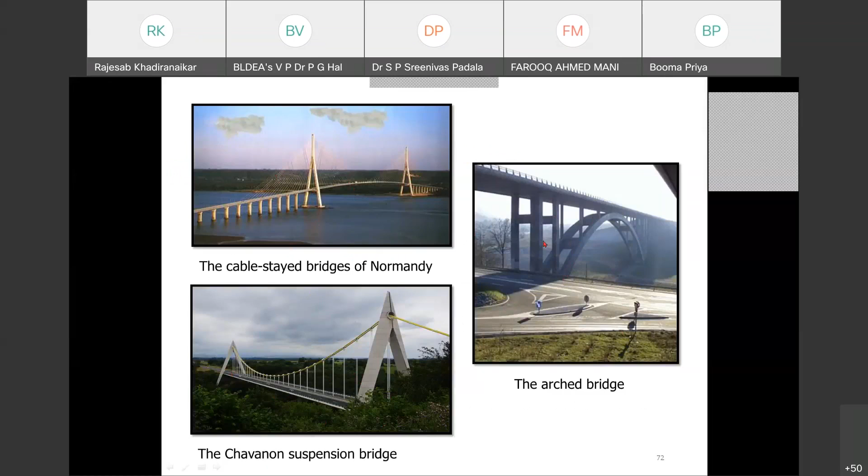The cable stayed bridge, so you have. And then this is a suspension bridge. This is arch bridge, wherein you have the heavy columns also provided. And the Water Tower Place building.

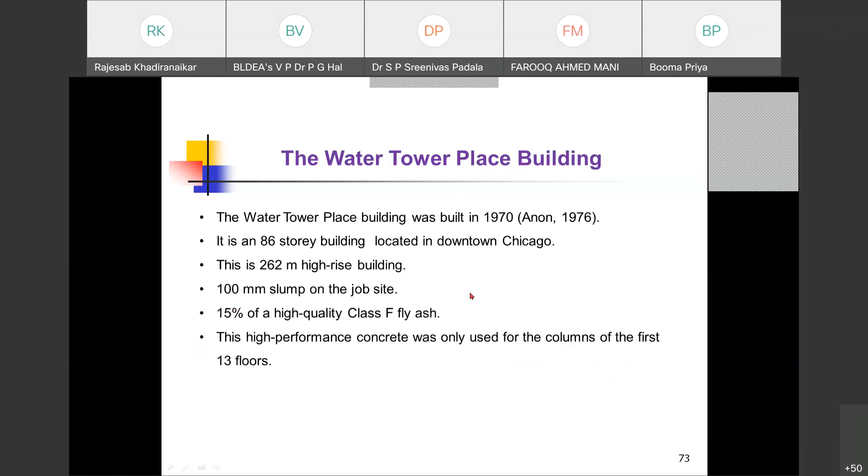Water Tower Place. The Water Tower Place building built in 70s, completed in 76. It has 86 stories in Chicago. It is 262 meters high. The slump used was 100 mm. Here 15% class F fly ash has been used. So this is the Water Tower building.

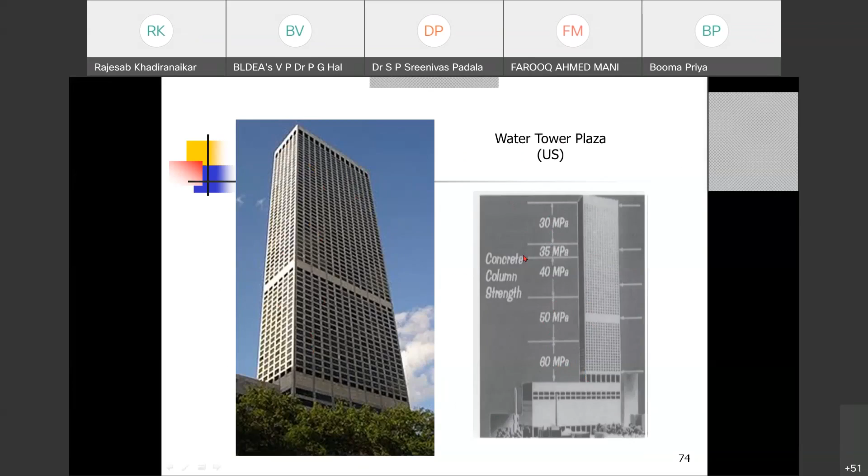The specialty of this building is that for the entire structure, the range of strength used is different. So up to this point, they use 60 MPa, and then to this point around 50 MPa. So as they move up, they used the lower strength because the number of stories above are less, and then the load is less.

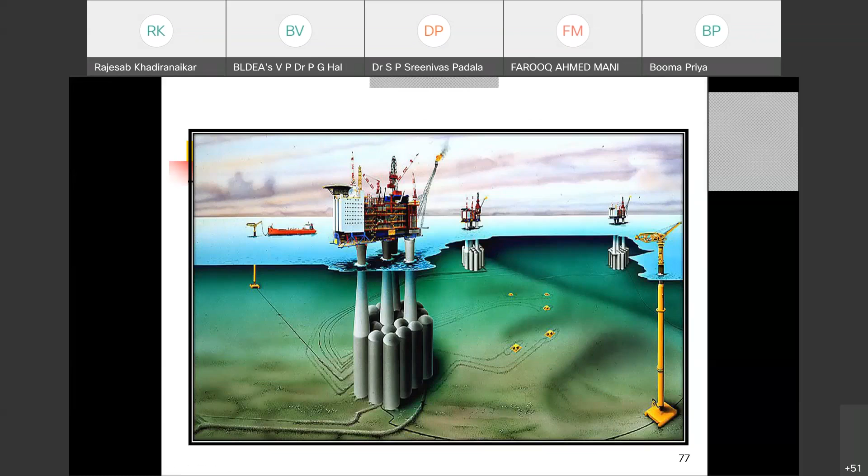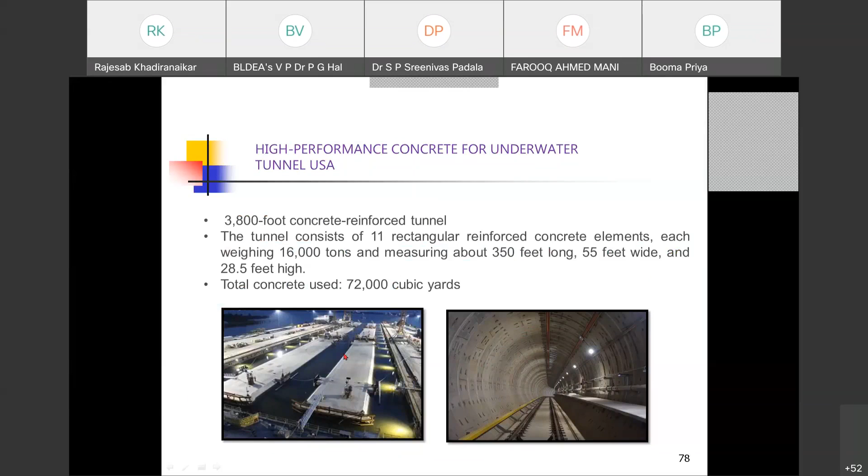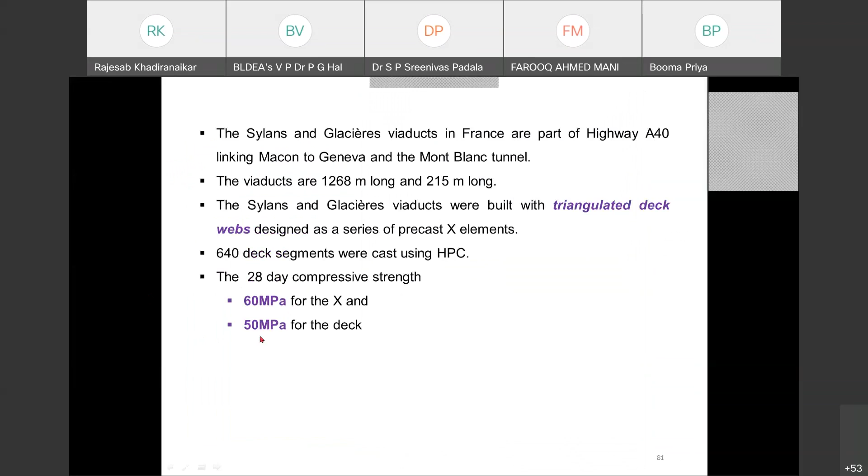And then concrete for underwater tunnels and even the tunnels and offshore structures, underwater structures, because the performance is a major issue. The durability is a major issue. And this is Sylans and Glacières Viaduct that is constructed using the triangulated deck webs. And then this is the details of that. For a cross section, they used 60 MPa, and for the deck slab, they used 50 MPa.

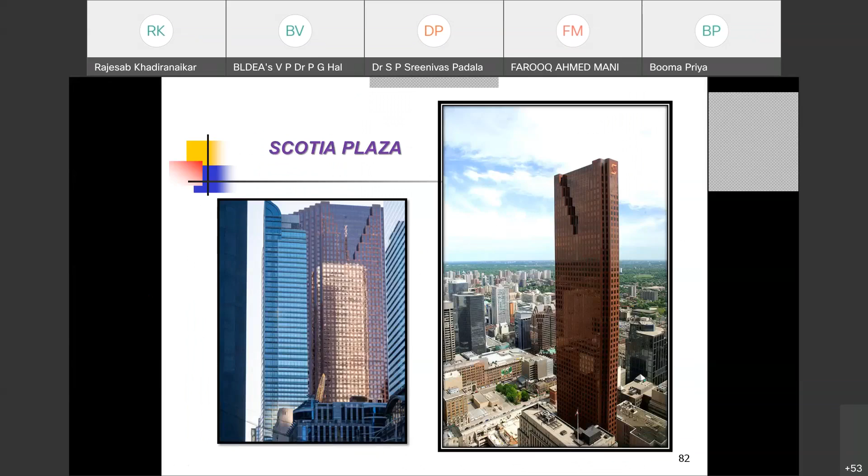The details are available. You can see this is a Scotia Plaza building in Canada. A beautiful view of that building. The details: 60 stories, 70 MPa concrete in Canada. And case studies. Of course, this was our own study, so it is not required since we are running out of time. So I will conclude here. If you have any questions, then ask your questions.

Sir, there is one more question from Dr. Preeti A. Patel. Which type of superplasticizers are preferable? Fourth generation are better. It depends on what is the water cement ratio that you are going in for. If you are going in for in the range of 0.3 or 0.32, then even SNF, SMF is okay.

If you are targeting for say a water cement ratio of 0.2 or 0.25, then carboxylic based, that is the fourth generation, what is generally called carboxylic ethers and all that. So you have to go for that. It depends on what is the water cement ratio that you are starting with, and then what is your targeted workability. That also matters. But HRWRs are better than your SNF, SMF, and those things.